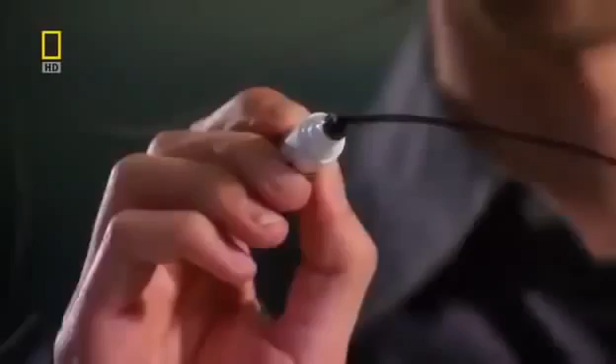The architects look for inspiration in Abu Dhabi's landscape. They find it in the wind-swept dunes and the rolling waves of the Persian Gulf. We took this idea of wind and water, which are both dynamic, fluid type of rhythms of nature, and we said, how can we capture those in time? As a result, you get a much smoother phase. I was really very happy when we first saw it, because with such a building, you can get the first impression from the first few seconds.

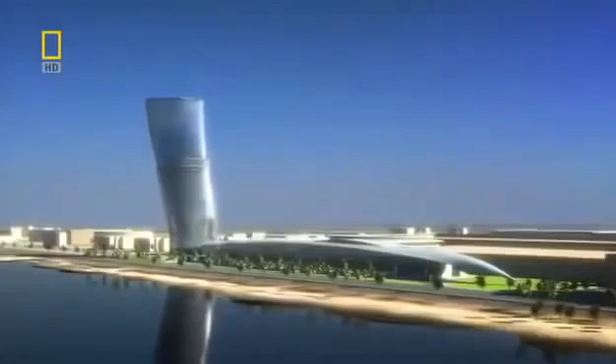The team come up with an extraordinary design. A tower that spirals out of the ground to 160 meters. Inspired by a desert whirlwind and the splash of a wave rising over the sand. This gravity-defying skyscraper tilts almost 5 times more than Italy's Leaning Tower of Pisa. No single angle of this tower is the same as another. It's a structure guaranteed to amaze.

We really wanted this to happen. They could see a vision suddenly. They could see something that would stand for them. Then there was no stopping us. Sheikh Sultan wants the lower floors to become the most prestigious office address in Abu Dhabi, with the top 18 levels assigned as a 5-star hotel fit for royalty.

But for maximum impact, this landmark skyscraper also needs a prestigious location. The Sheikh decides the tower will stand next to a monument of national importance, the Grandstand. Built by his uncle and founding father of the United Arab Emirates, Sheikh Zayed, it's used to this day for national celebrations. This monument and the skyscraper will link Abu Dhabi's future with its past.

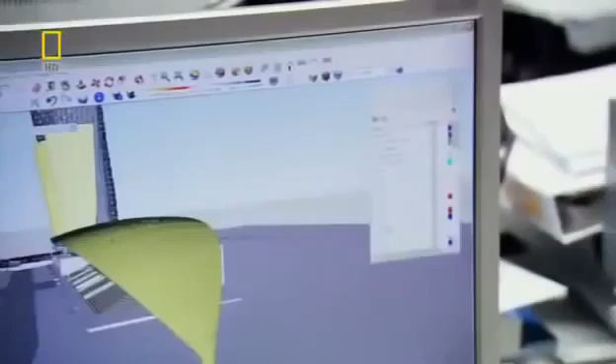Now, the idea must make the leap from the drawing board to the construction site. The only problem is, no one has ever attempted a skyscraper like this before. Everyone realized that this is a crazy structure to build, and how are we going to build it?

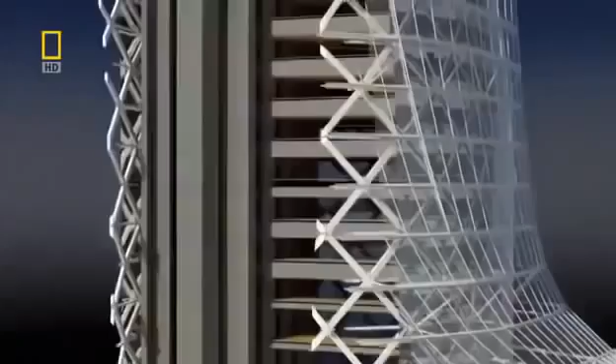To make Capital Gate's gravity-defying design a reality, it'll take some extraordinary engineering, and the challenge begins on day one. Its top floors overhang its base by 33 meters, creating huge forces that want to rip the building's foundations out of the ground.

At the construction site, project architect Tony Archibald is daunted by the task ahead. When I first joined the job, I was shown the drawings, and I kind of did a double take, and I wasn't quite sure that I got the correct understanding of the project, and it took me a few moments before I realized what we were about to undertake.

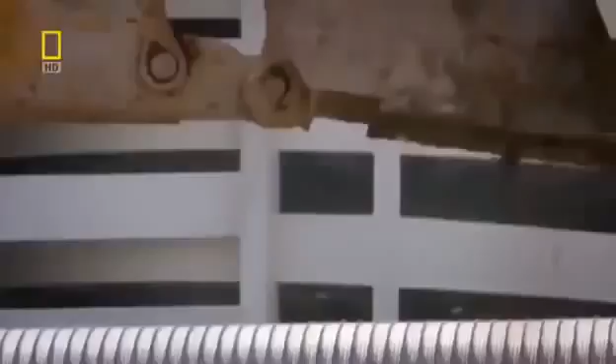Keeping Capital Gate upright is a huge engineering challenge. There isn't just one solution. To overcome the forces of gravity, it will take a whole range of pioneering techniques. But the task starts with the foundations deep underground. On one side of the building, the weight is going down into the ground. On the other side, it's being lifted out of the ground. And that's due to the large overhang that we're having to deal with.

The solution requires almost 400 concrete piles that work in 2 different ways. On the leaning side, half of the piles push the overhang's forces into the ground. On the opposite side, the remaining piles anchor deeper into the bedrock. They resist the stretching forces trying to wrench the building out of the ground.

Finally, to evenly distribute Capital Gate's forces into the piles, a deep concrete slab reinforced with steel is laid on top. What the foundations taught us is that every single aspect of this building has to be custom engineered.

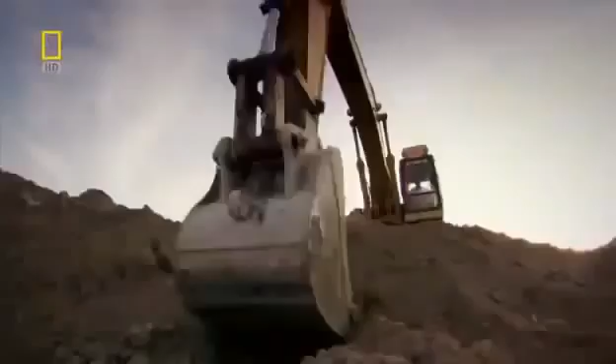Excavators dig out a colossal 6,000 cubic meters of sand. And over 8 weeks, hundreds of piles are driven into the ground. We had an awful lot of piles to put in a very close proximity. It was a real difficult challenge. There can be no let-up on this schedule. Sheikh Sultan wants Capital Gate complete by an impossibly tight deadline.

In less than 2 years' time, Abu Dhabi will host the World Future Energy Summit. Over 3,000 delegates from 50 countries and the world's press will convene at the neighboring Abu Dhabi National Exhibition Center. It's the perfect opportunity to showcase Capital Gate and prove Abu Dhabi is at the forefront of innovation.

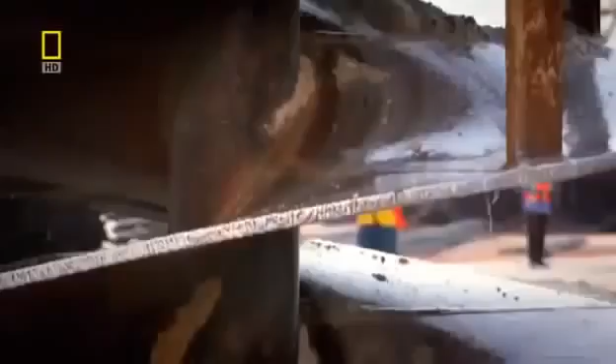But this gives the team just 24 months to design and build a unique skyscraper. With the foundations finished, building above ground can begin. But because of the dramatic lean, it will have to be constructed in a very different way to a conventional skyscraper. We realized once we'd done the foundations that this was going to be the first of many difficult problems.

A normal skyscraper requires a solid core to hold it upright. But Capital Gate's curves will just crack and topple a standard core. Engineers must discard conventional thinking and devise a way to defy gravity. Inspired by the nearby desert landscape and its wind-shaped dunes, architects have designed a curved leaning tower. But it'll take some audacious engineering to stop Capital Gate from falling over.

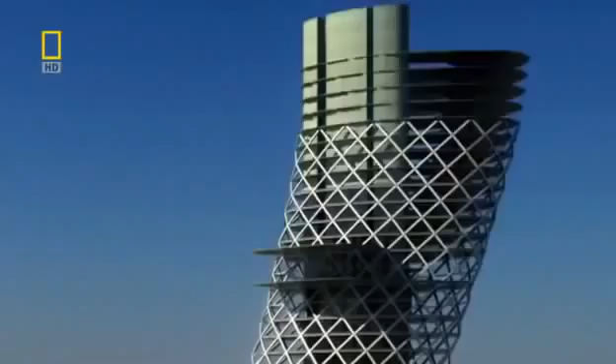Normal skyscrapers are built around a slim vertical core, which helps to channel the building's weight into the ground. There's so much overhang on this building that a conventional core was no way going to work. You just can't build a straight core. It's just not strong enough. Capital Gate's design would cause a conventional core to bend dangerously. The pull of the massive overhang wants to stretch the core on one side, causing the concrete to tear apart.

Structural engineer Mona Vasi knows it's a serious problem that must be solved. When I saw this one, I thought it's impossible, it's not going to work. It's just some sketch somebody left somewhere. But I always think that for the architects, it's easier to just draw something, but it's not easy for us to fulfill or satisfy their need.

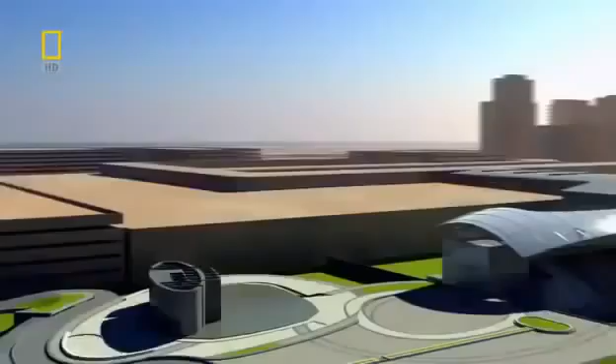The engineers developed two groundbreaking solutions. The first part of their plan is to build the core with a curve, bending in the opposite direction to the building's lean. As the structure grows, its weight pulls the core straight. In total, it shifts 350 millimeters, and the effect is significant. The concrete that would have been stretched by the overhang's pull will now be compressed and strengthened.

You build it bent, and then as you add the slabs to the upper levels, it pulls it back into vertical. So basically that whole vertical core is in compression, and that gives it immense strength.

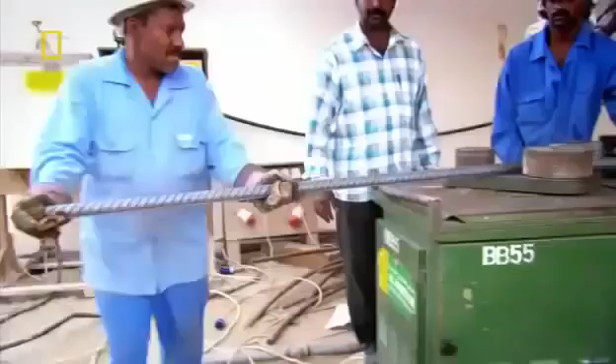The core grows 4 meters a week, and construction manager Les Fairchild is in charge of building it. This is probably the most complex core that I've come across. It's built at an angle, and effectively the core holds the whole building up.

The core is built using a technique called jump forming. First, a dense mesh of steel reinforcement is assembled. A mold then closes around the steel to form the shape of the core. The steel mesh is then filled with concrete. Then the mold or form can climb up the core wall for the process to start all over again.

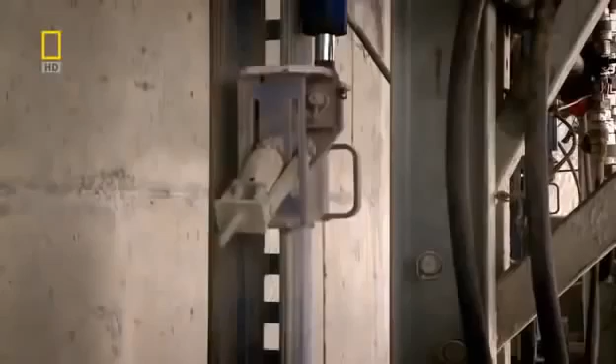Jump form is a hydraulic platform. Once we've cast each 4-metre level, we simply attach it to some runners and we jump it hydraulically up to the next level. The core will be strengthened as it straightens. But for the core to carry extreme loads, the concrete must be reinforced using steel rods called rebar.

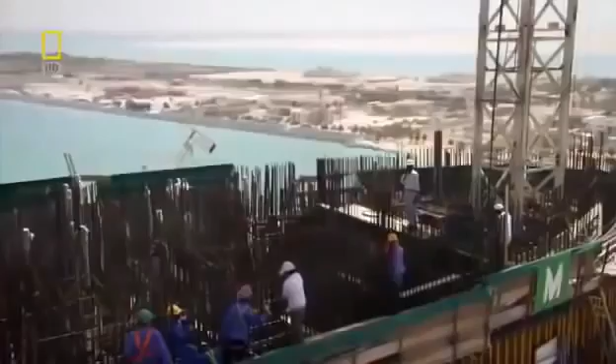The rebar is installed during the daytime, but temperatures of up to 50 degrees Celsius and concrete don't mix. It dries too fast and could crack. To set at the right speed, the concrete has to be poured during the cool of the night. As the core grows higher, the liquid concrete has to be pumped over longer and longer distances. So the consistency of every batch is first checked in a slump test to ensure it won't block the pipes.

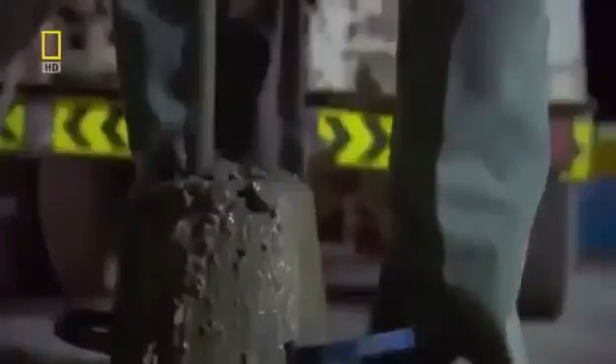When you first see it coming out the wagon, you can usually tell whether it's a tight mix or whether it's a loose mix, and that's what we're testing for really in the slump test. We simply make a cone, lift the cone off, and depending on how much it reduces in height, tells you exactly what the slump is. The one we just witnessed is 215 millimetres, which is within the specification, so that's good to go.

Whilst the truck drives to the pump, Fairchild needs to get onto the core. He can take the stairs, but 90 meters up is a long climb. He knows a much faster way. Crane lift.

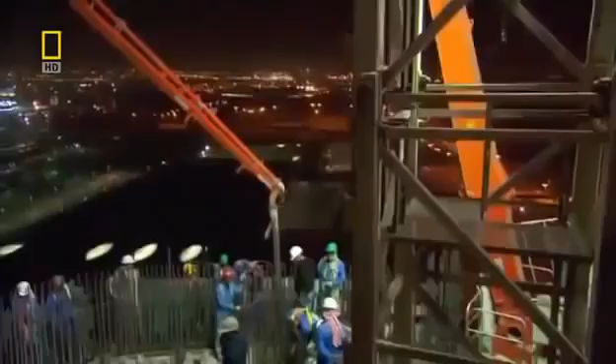It's going fairly well. We've had a nice continuous supply of concrete, and we're now pumping it up to the upper levels of the building. And the lads are just steadily working away. They actually work from one side to the other in metre deep layers, so they're doing everything right. It's always exciting when we pour concrete. It means it's another achievement really. We're going up another level.

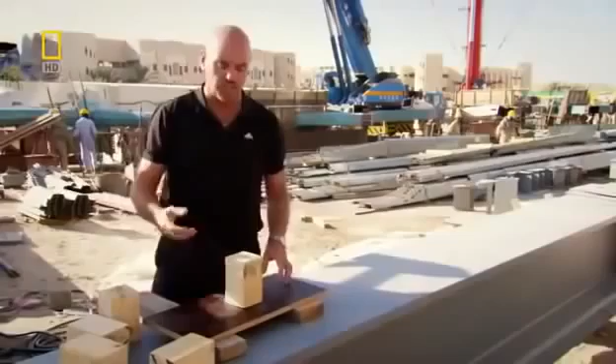But building the core out of alignment and packing it with rebar still isn't enough to stop gravity toppling Capital Gate. What we came up with is a post-tensioning solution where we introduced much more reinforcement into the core wall and then used a tensioning process. Basically that was done by introducing high tensile strands to the centre of the walls.

When we reach the designated height, we simply apply tension. We're actually stretching the tendons that fall through the wall, and we're actually pulling them tight, and that's done by a tensioning machine. So effectively, when the tension is complete and the load was applied, the core would stay intact, and the additional reinforcement would prevent it from falling over.

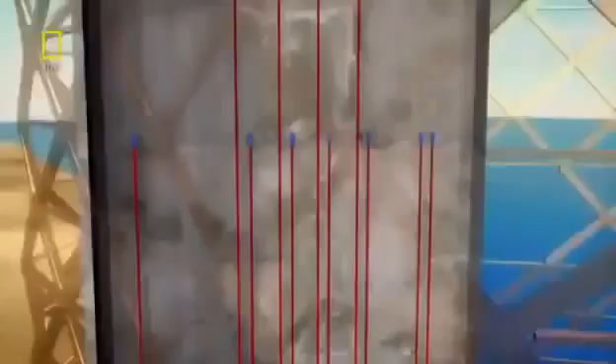To post-tension the core, 146 steel tendons are threaded vertically through the concrete. Each tendon is 20 meters long and runs through 5 floors of the building, overlapping each other for maximum strength. When the tendons are stretched, the stress counteracts the pulling force created by the massive overhang, stopping the concrete from tearing apart.

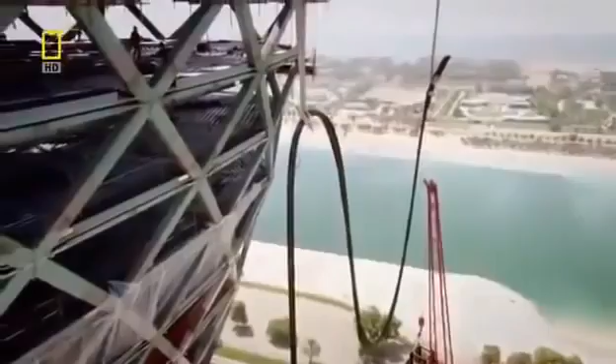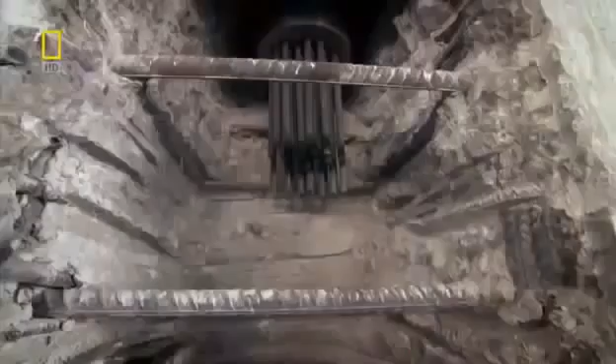On site, the team are post-tensioning the core, but no one has ever attempted this vertically in a skyscraper. The long tendon is lifted to the top of the core. The team use the steel tendon's weight to force it through a duct already cast through the core. Once the tendon is in position, the team lock off both ends, ready to tension its individual strands.

Okay. A hydraulic jack clamps around one strand at a time and stretches it. It's equivalent to about 5 family cars pulling on one end of the rope. With the steel tendon now stretched to the right stress level, concrete pouring can continue upwards.

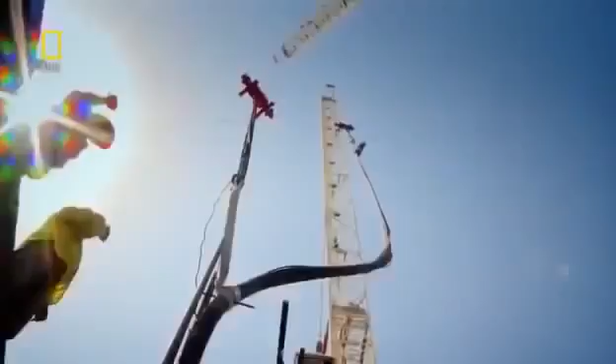The quantity of cable that's been used is approximately 120 tons and 120,000 meters in length. It's about 44 times the Golden Gate Bridge. This process is repeated over and over and means the core should withstand the huge loads generated by Capital Gate's extreme overhang.

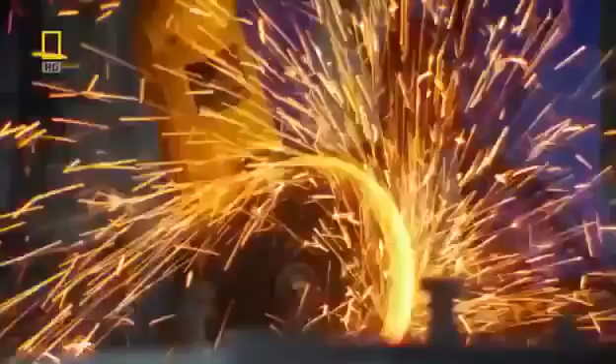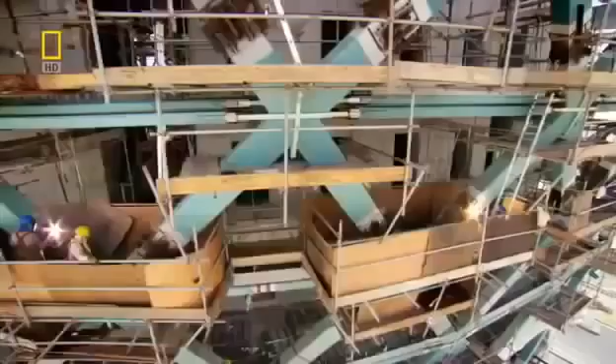But now, an even greater challenge must be tackled. The building's twisting, leaning design must somehow be turned from theory into reality. And once again, it'll mean bending the rules of architecture. To create Abu Dhabi's architectural icon, Capital Gate needs an exterior curved leaning frame. But once again, the building's extreme tilt creates a problem.

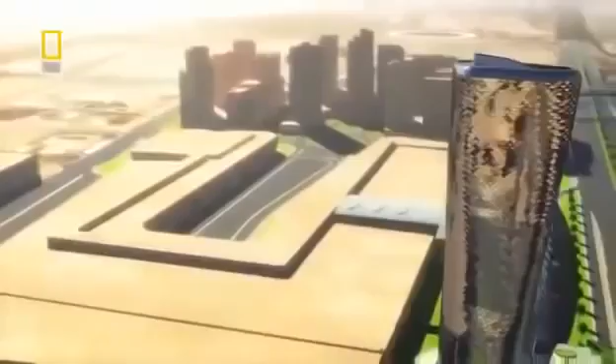The shape of the building with this very pronounced overhang meant that traditional skyscraper building solutions just weren't going to work. There's no way. The building design requires it to be thin to maximize floor space and allow for huge panoramic windows. Irfan Ahmed is one of the engineers who has to find a solution. For structural engineers, always it's challenging to accept the architectural requirement, you know. They always want thinner and thinner and thinner.

Surprisingly, the humble chicken could help with this engineering dilemma. It is essentially a skin of structure around the outside of the building, not unlike an egg. An egg can withstand huge loads because it evenly distributes forces down through its shell, which means the shell can be thin, creating more space inside. So it's very, very thin, it's very, very strong. If I try to crush this egg, you can see that it's actually amazingly resilient. So let's see how resilient.

Here I have 170 eggs laid out, and we're going to put load on top of these in the form of breeze blocks. Moment of truth. So far, so good. Each one of these blocks weighs 15 kilos. So we've nearly got half the weight of a car on here now, on our 170 eggs. Let's see how far we can push this.

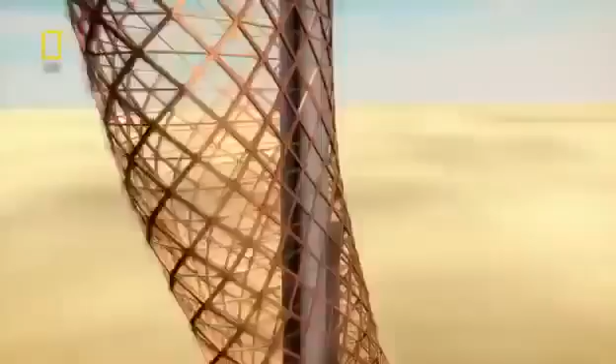Capital Gate can't channel forces with eggshell, but it can use the principle of how it works, using a diagrid. A diagrid is a giant mesh of steel that wraps around the core. Steel beams connect to a node or joint to form a cruciform section. 720 uniquely shaped sections link together to form the thin but immensely strong diagrid. Working together, these cruciforms equally distribute the forces down the outside of the building. The way it does that is by making a uniform net, so that the forces are very evenly distributed, and that means that we can get away with slenderer sections.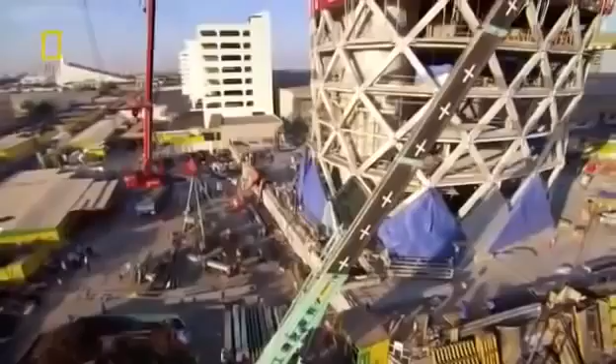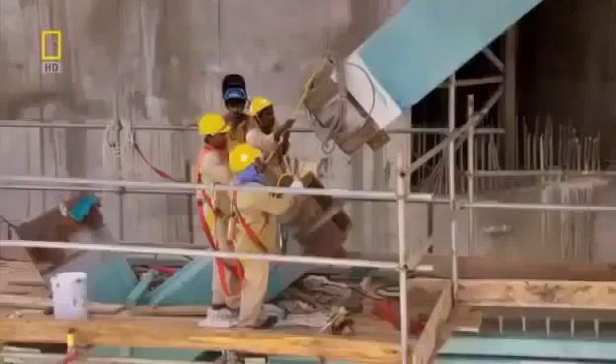On site, a team of 240 steel fabricators assemble the diagrid. They've built the easier straight part of Capital Gate's base, but now the structure is starting to lean, making installation even more challenging. Each cruciform, weighing up to 16 tons, has a unique geometry and must be crane lifted at a precise angle. If the diagrid is not assembled with millimeter accuracy, the mesh will not channel the loads and the structure could be weakened.

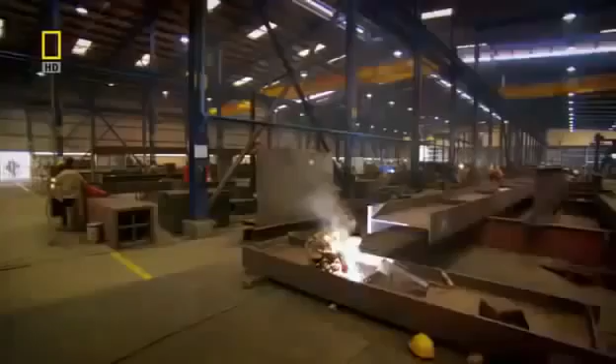The engineers must communicate closely with the expert steel fabricators. They design and manufacture the diagrid 150 kilometers away in the neighboring emirate, Sharjah. Here, cutting-edge construction is the norm. They've built one of Malaysia's Petronas Towers and Dubai's iconic skyscrapers, the Burj Al Arab and the Burj Khalifa. But Capital Gate's revolutionary design pushes even these experts to the limit.

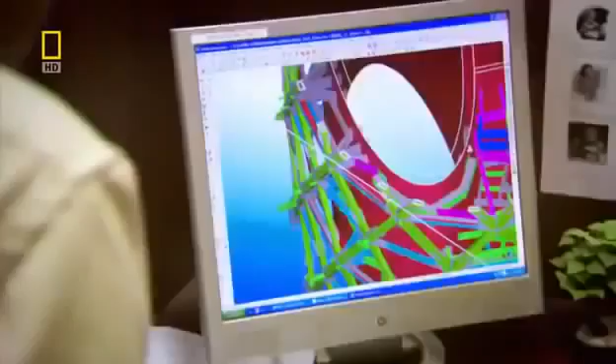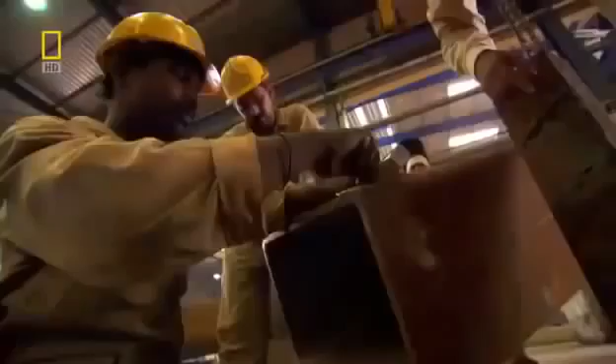On the planning floor, project engineer P. Bhaskaran and his team need bespoke 3D software to tackle the building's highly complex diagrid. The 3D modeling is done, and any unforeseen criticalities will be very clearly identified in the 3D model. Each one of the 720 cruciforms is precision engineered, not only to channel huge forces, but to connect with millimeter accuracy to the neighboring cruciforms and the glass facade. But to measure their exact angles, the team used some old-school technology: chalk. It might look unsophisticated, but it's highly accurate, ensuring all the elements will join together.

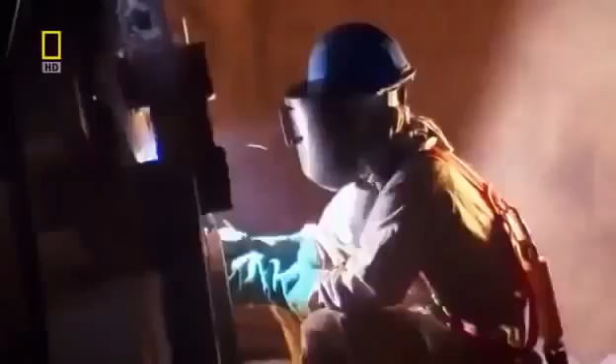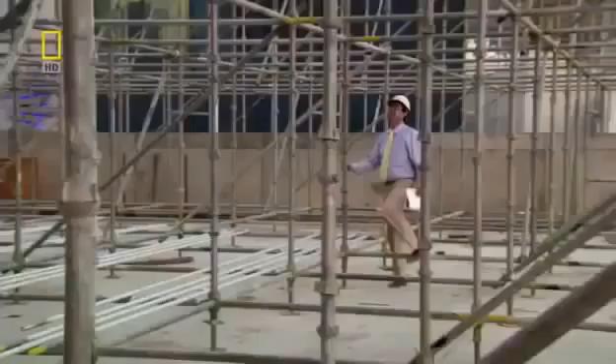To keep up with construction, the factory must produce 18 cruciforms every week. Constructing such a huge building, the critical building within the short span, without working 24 hours, it is absolutely not going to happen. As the skyscraper reaches new heights, the long hours start to pay off. This design pushes the diagrid technology to its absolute limit, and in fact far beyond what's ever been achieved so far. Even in your dreams, you're thinking about this project. So once you see the structure coming up, you forget all the long hours you spend and all the sleepless nights.

A colossus is fast emerging from the Abu Dhabi sands. Now, this leaning tower must be clad with a glass facade. And as always with this gravity-defying structure, it's going to require some revolutionary engineering.

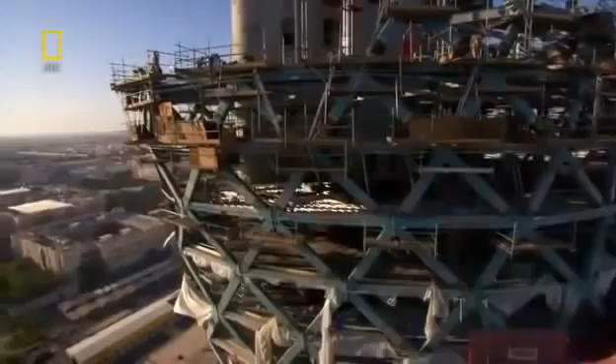Glazing Capital Gate's leaning curved frame is a major problem. Covering its unusual contours with curved glass will blow the budget. So the skyscraper's curves must somehow be clad using cost-effective flat glass panes. Fortunately, ancient Greek geometry can help.

Because you've got a complex shape, it's an organic shape, it's a curved shape, the only way to model that with straight lines is to use triangles. Triangular panes can pivot in 3 directions, and when joined together can cover complex geometric surfaces. But because every angle of the building is unique, it'll take 26,000 triangular panes to form the facade.

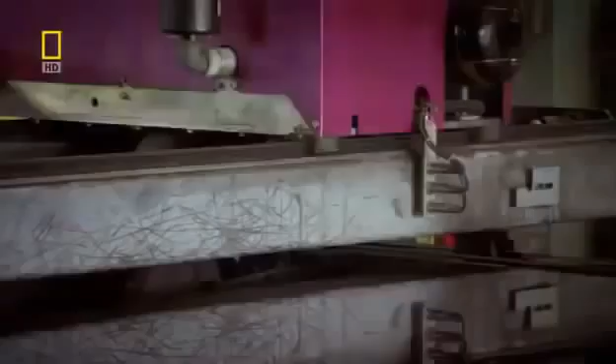With so many glass triangles to cut, the local glass factory springs into action. Each pane is scored by an automated diamond cutter to an exact pattern. The triangles are then sent along the production line. The team is under constant pressure to deliver enough glass to the site.

Hey, this side, you guys, hold it.

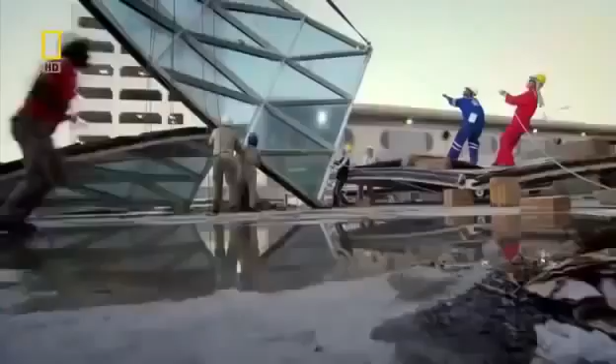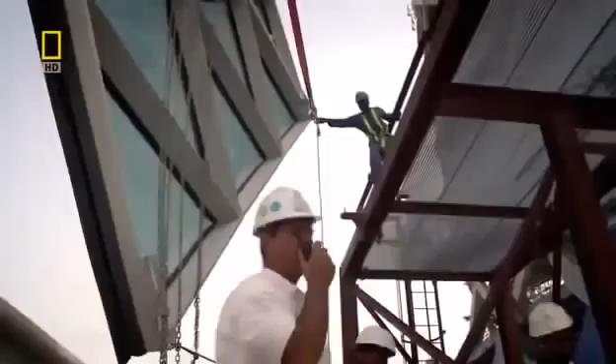After several weeks, 8 diamonds are in place and another 100 standing by. But the glass design is so unconventional, it still has to pass a number of tests to prove it's up to the job. Because we'd already started the glass installation, the results of this test were absolutely key. Each panel is stacked one upon the other. So if we'd had any kind of problem, we would have had to unstack them, which would have had disastrous consequences for the program.

This is no ordinary glass skin after all. Capital Gate's core straightens as it grows. The skyscraper will not stop moving until after completion. Normal glass facades can accommodate minute movements caused by wind and temperature changes. But to stop the glass shattering and keep the building watertight, the panels must be designed to shift by up to 20 millimeters. The scale of that kind of movement is almost unheard of in glazing systems. It's a vast amount of movement.

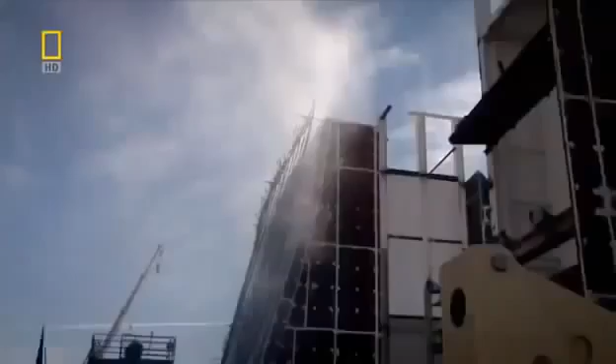With glass installation ongoing, construction manager Craig Rooney needs to know the panels will perform. We don't want to get to the top, we've done it, we've installed it, we think we've done a great job, and then it all leaks. The panels must be tested to the limit at a Dubai laboratory. A plane engine and many liters of water simulate worst-case scenario weather.

Now the moment of truth. Any leaks could be a disaster. And it's bad news. The first time we got a full water test, we had a leak. The fact that we had a leak was devastating to the whole team and very alarming. The diamonds connect to each other by a bespoke two-layer seal. The flexible spongy seal allows the diamonds to move and keeps water out. But if any water does seep through the outer seal, drainage tubes fitted at intervals let the water flow away.

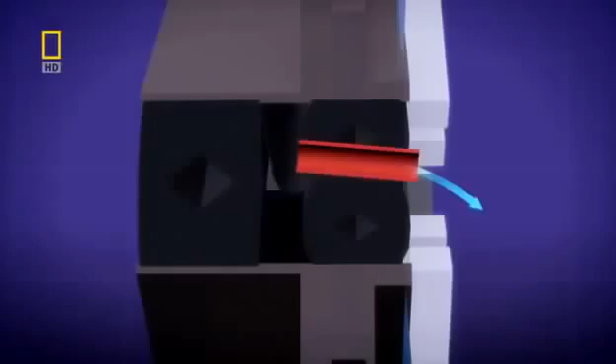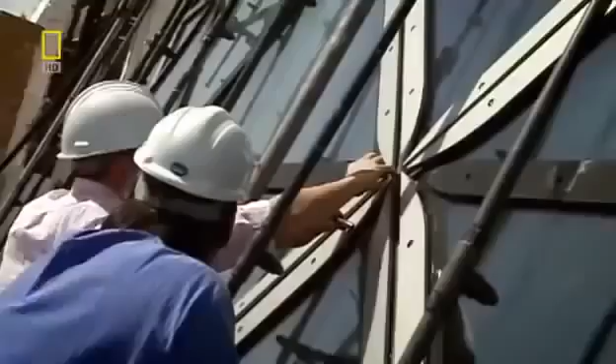The panel has failed the test. Water has flooded inside and penetrated the inner seal. If it was a fundamental failure, we're back to the drawing board, so the cost and the budget and the program all go completely out the window. The panel is examined. Answers are needed fast. Fortunately, it's not a design failure. They discover a drainage tube is only blocked with sand. The problem resolved, installation can step up a gear.

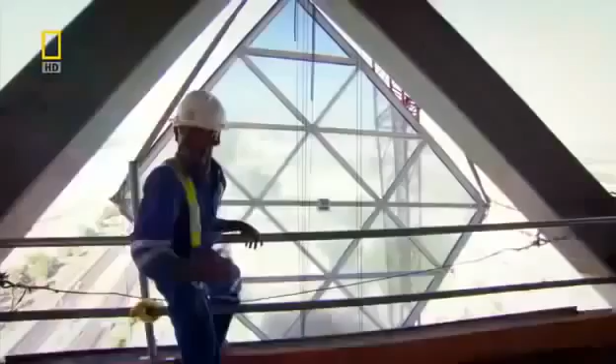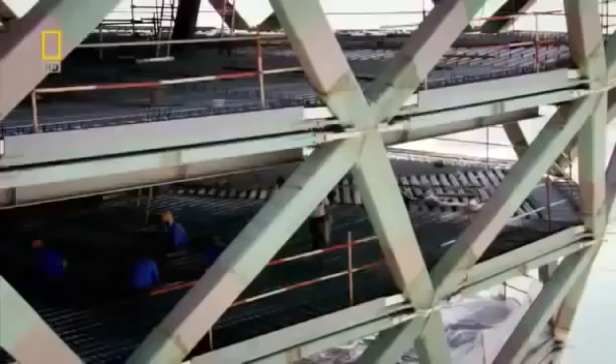But as always with this audacious building, one problem is solved and another is just around the corner. To give Capital Gate's five-star hotel lobby the wow factor, architects again plan to push the design to the extreme. Now they want to build an infinity pool and a restaurant, hanging 100 meters above the ground.

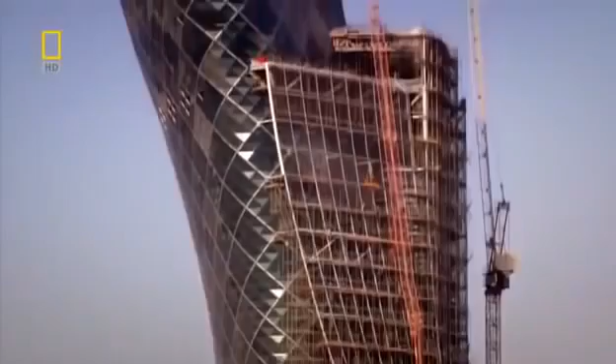18 months into the build, Capital Gate's design is about to give a new slant on high-rise living. The architects want a pool deck and restaurant suspended in the sky, but it's an engineering headache. There's so many requirements that architects have that really put us in so much trouble as engineers, but you want to make sure you have a safe structure.

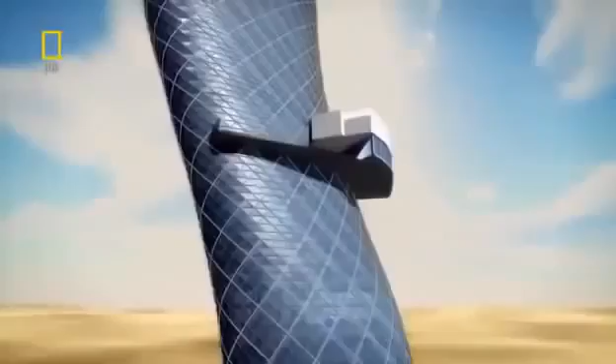The design calls for a two-story extension, hanging without any visible support. But the pool's water alone will weigh 150 tons. The structure's huge mass means it needs reinforcement. We needed some supports from below, otherwise there was no other solution. I don't think you can have a cantilever that huge on this building, no way. The design will only work if it's underpinned with 22 steel struts. They will carry the loads back into the building. But the struts must also look delicate to meet the architect's aesthetic demands.

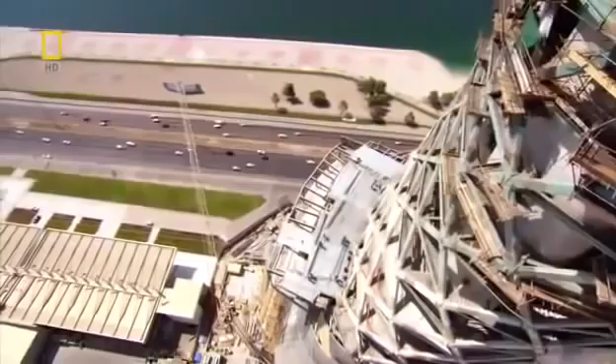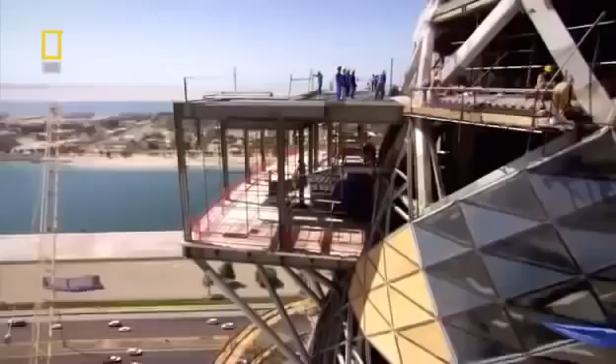On the construction site, 90 meters up, the pool and restaurant is taking shape. All of its structural elements are in position, except one. The team are raising its last 6-ton floor beam.

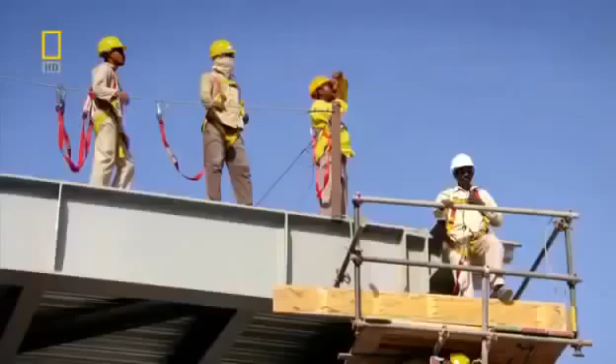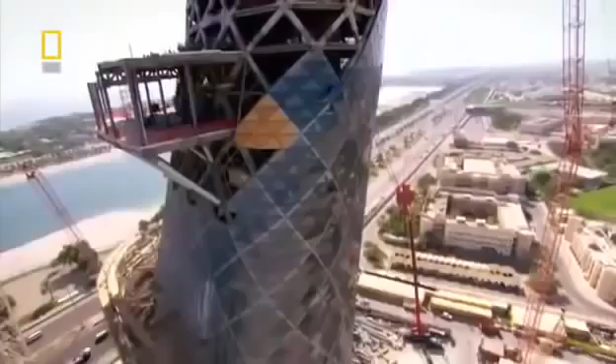And the structure's muscular struts and connections are also elegant. The idea behind these junctions is that they behave like the insects that can walk on water. They're sufficiently light that the surface tension keeps them above the water. So these little brackets dissipate the forces from all that weight.

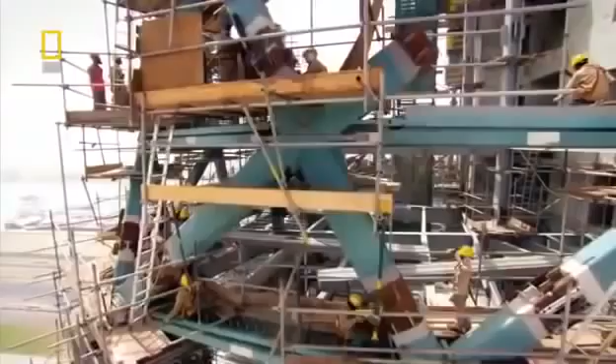Capital Gate is fast becoming an Abu Dhabi landmark. But the taller it gets, the more the weight of its upper floors is a problem. The skyscraper needs to go on a diet. And this time, the architects come up with a clever solution. The building has lots of visual surprises.

And one of the most important ones of those is the internal atrium. It's a kind of a light well that brings light from the sky deep inside the building, and it extends over half the height of the building. So it starts out very, very small at the bottom and opens out in a big funnel. This cavernous hole is good news for reducing weight and minimizes forces.

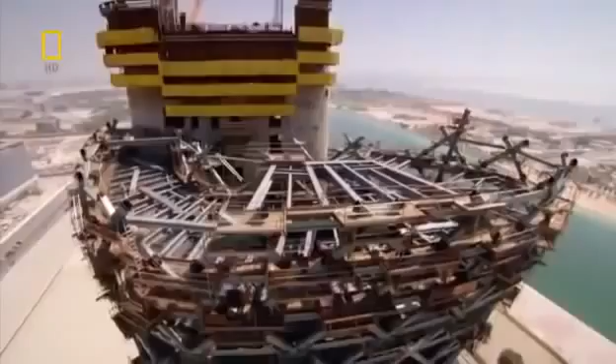But the atrium is a double-edged sword. The floors are critical in transferring loads from the diagrid to the core. A giant hole through 18 floors means these loads must find another pathway. It's a very, very big hole in every single floor plate. So our engineers really had their work cut out.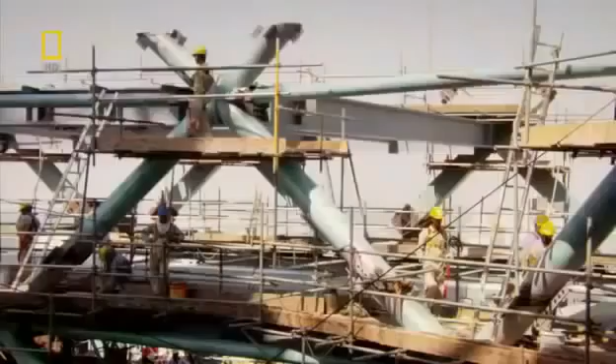You don't want to have an opening in your floor. You want to have more concrete, reinforced concrete, to transfer these forces. The forces need to flow away. And the solution is pioneering. An internal web of steel mirroring the external diagrid. This is the first time we've ever heard of this being done.

The internal diagrid is actually a fundamental part of the structure. This funnel-shaped internal skeleton carries the forces of an 18-story building down to its tapered base and into the core. But the loads are extremely high for such a small area. To stop the atrium punching through the core wall, the concrete needs protection.

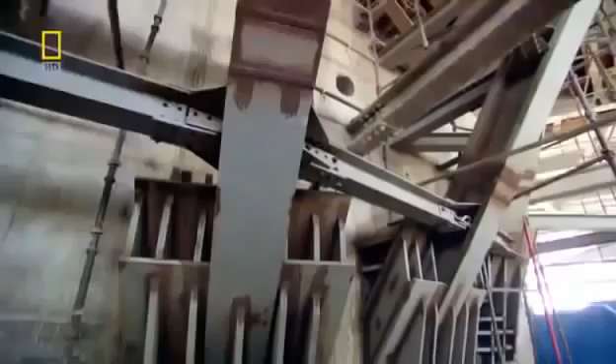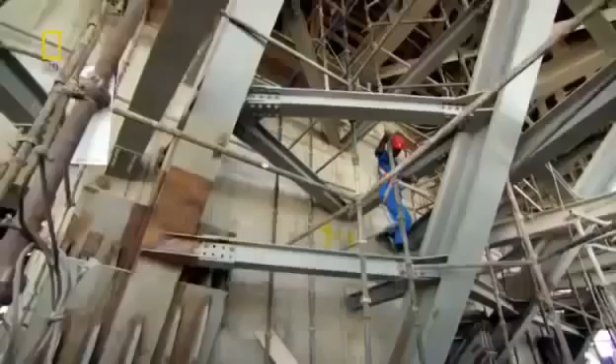The answer? 6 giant plates of steel that brace the connection to the core wall. The connections are really a wonderful, wonderful piece of engineering. They're 8 meters high. They span 2 floors, and they connect back into the core. The atrium's near completion brings Abu Dhabi one step closer to achieving an iconic landmark.

But as the sun goes down, this isn't the only celebration underway. On site, the Indian steel team are holding an annual blessing to the Hindu god Lord Vishwakarma, the protector of architects and engineers. Their livelihoods depend on staying safe, and although they use safety equipment and are highly skilled, working with huge sections of steel at height is never risk-free.

We pay our respect to God and get the blessings from the God. We do that for the safety of all our workers and for the proper completion of the job. Every trade of workers we take, the basic tools they are using on site, that has to be kept in front of God, and the workers feel themselves that they are in safe hands. The tools are now blessed, and the steel team's morale is high.

But the glass installers, lifting diamonds to over a height of 100 meters, are getting the wrong kind of lift from Abu Dhabi's highly unpredictable wind. If the wind is too strong, then you can feel this in your hands when you hold these diamonds by rope. I always get nervous if I see the panel starting turning. And this makes me always a little bit afraid when I see diamonds going up and starting moving.

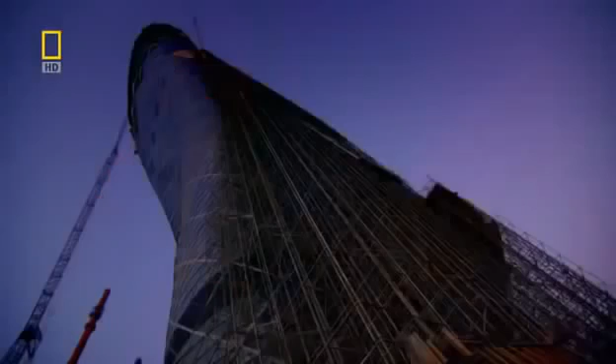With just 6 months to go to completion, the Capital Gate team should be on the home straight. But those plans may have to be put on hold. I had a telephone call saying that we had to put a helipad on the roof, which I thought was a joke, but I was astounded that we got this at such a late point in the project.

Integrating what will be Abu Dhabi's highest helipad atop one of the world's most daring skyscrapers at first seems a simple request. But it actually poses 2 serious problems. It'll create new forces that must be absorbed by the already strained core, and unpredictable wind flows that can cause potentially lethal flying conditions. You get a thing called wind shear, tipping the whole helicopter onto its side. And this is a very real and very dangerous risk.

These rapid wind changes, known as wind shear, can affect the lift on helicopter blades. Aircraft can be blown off course, or literally fall out of the sky. There is no way that we could have any margin of error on the safety. The only way we could predict what the wind shear would be like on the top of the building was to model it in a wind tunnel.

Wind impacting the helipad is also creating huge suction forces. We're talking about very large forces here wanting to pull the helipad off the top of the building. Something in the realm of several large trucks or big rigs trying to pull this helipad away.

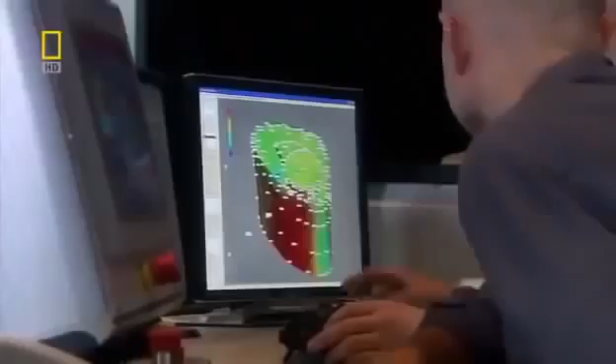To make the helipad safe, Aurelius and his team have to go against conventional thinking. We didn't think that lowering the helipad was actually going to be the optimum design, but we see reduced loading on the helipad as well as safer conditions for the pilots to land in. Lowering the helideck to just 2 meters above the roof dramatically decreases the wind shear threat, and means Capital Gate's core will withstand the additional loads.

We're relieved, frankly. The tests have actually confirmed now that we can have it in our original design position, which is very low, which will mean that the profile on the skyline is exactly where we want it. But it'll take another 5 months to just draw up the helipad's blueprints, and a crane must be left behind to build it.

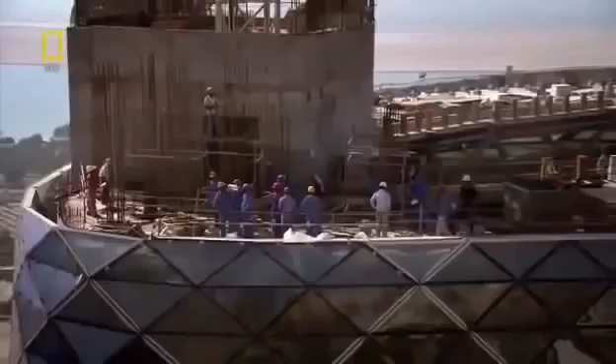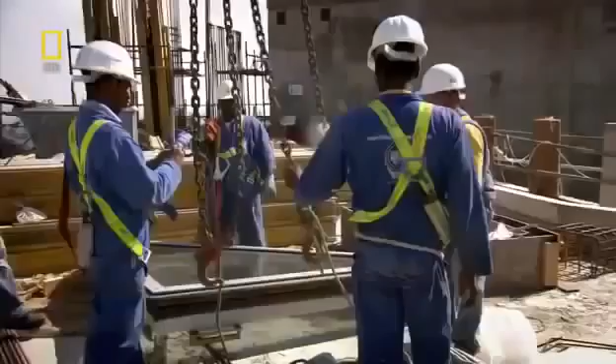Now, with only weeks to go until 0 hour, the team are installing one of the last glass panels. It's a moment that once seemed a long way off. In my office I have a plan of all the diamonds we have to install, and in the beginning it looked like I'm in jail and I'm marking the wall with marks for each day. And so at first I felt I never will finish this project. Just 10 months since the first diamond was fitted, the facade now shimmers in the sun.

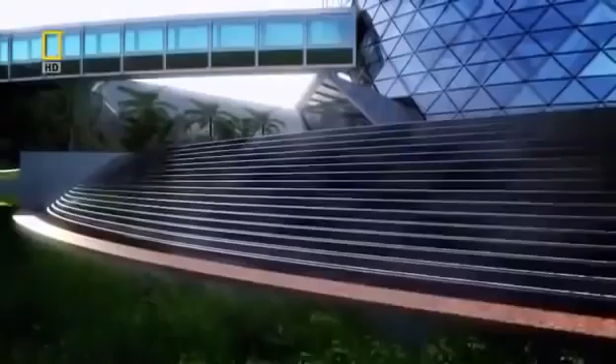Capital Gate's internal fit-out will take another year. Only then will its 5-star hotel and Abu Dhabi's most unusual office address be open for business. But against the odds, the team have created one of the most extraordinary megastructures on the planet. Capital Gate twists and spirals out of the ground, soaring to a full 162 meters. It's taken nearly 6 million man-hours to construct, and its overhang is spectacular.

You see the building and you stand underneath the overhang. It's extremely impressive. It's a fantastic feat of engineering. I feel as though I've been here an eternity, but it's probably been the quickest 2 years of my life. It's been an amazing journey, and we've learned so much. And actually, I think we've demonstrated that some things that looked impossible or even ridiculous were actually possible.

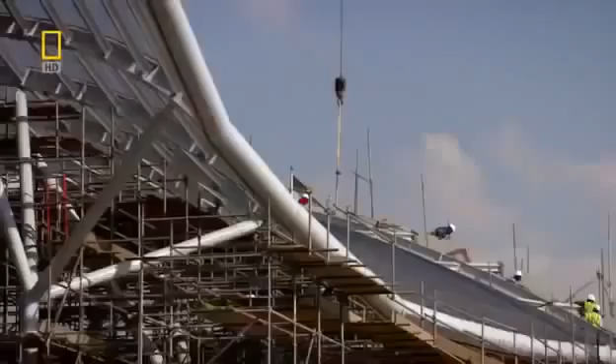And Abu Dhabi's past will soon be physically linked to its future by a wave of steel that'll rise over the grandstand and splash up the skyscraper's mirrored glass. Abu Dhabi is a fascinating part of the world to be at the moment. It says to people we can step outside of the box. We don't have to follow the rules.

With the 2010 World Future Energy Summit just weeks away, Sheikh Sultan can be sure Capital Gate will show the world what Abu Dhabi is capable of. This building is really iconic. It catches the spirit of Abu Dhabi and will be part of the postcard image of Abu Dhabi. The team have achieved what some thought was impossible. A leaning tower that claims the world record for the most inclined skyscraper on Earth.